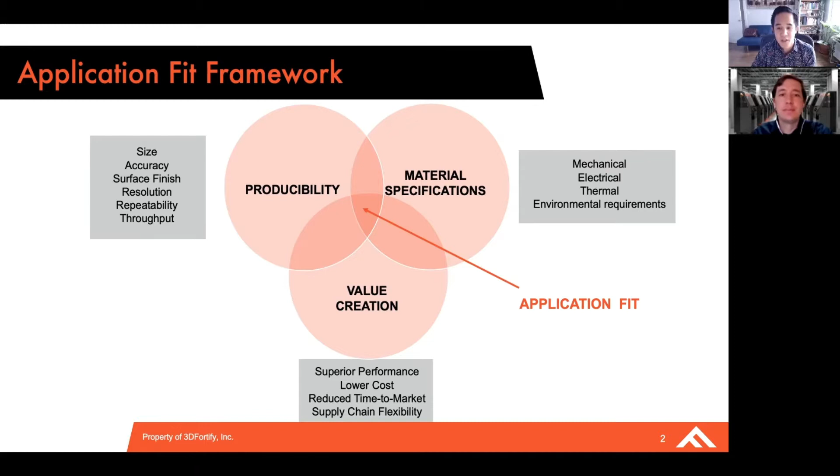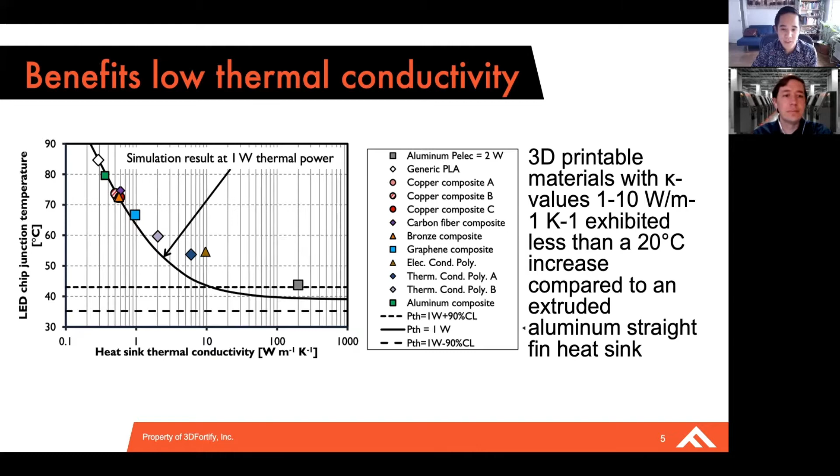Now, there have also been many studies performed on the efficacy of materials with lower conductivity values to ensure that there is still useful applicability. This figure highlights that materials with lower conductivity values between 1 and 10 watts per meter Kelvin still provide meaningful and adequate heat transfer, even when compared to aluminum. Some key application areas for us that fully take advantage of the benefits of polymer-based thermally conductive materials are high power electronics, fluid heat exchangers, and lighting applications.

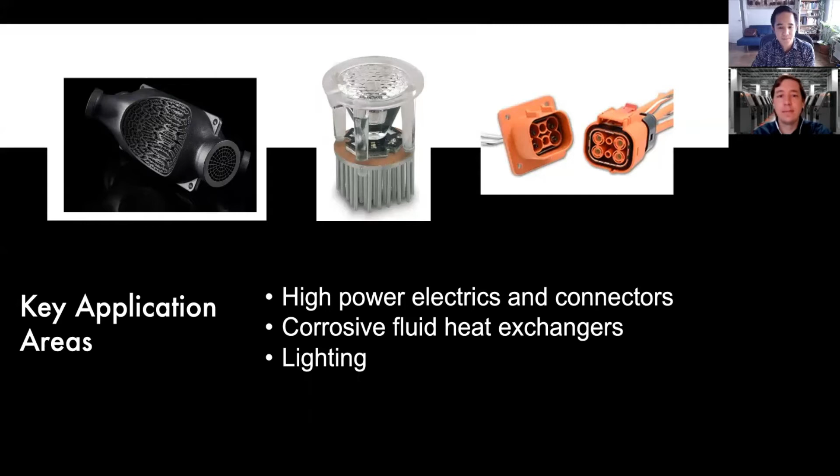Now, 3D printed ESD materials, on the other hand, provide many unique nuggets of value for those in industries such as electronic and PCB assembly. Oftentimes, ESD-related materials are injection molded or machined, leading to long lead times and limited geometric complexity. Additive ESD materials, on the other hand, require no CNC milling while still providing high dimensional accuracy. Combining ESD fillers in a high temperature photopolymer resin system enables the use of these materials in high temperature applications where this material would need to resist forces such as creep.

Lastly, by printing these materials on demand, you can shave off up to 90% of the lead time for procurement when compared to traditional manufacturing. Some key application areas for us to fully take advantage of ESD materials are high power manufacturing aids such as jigs and fixtures, ESD safe required machine tools, and materials that operate in combustible environments.

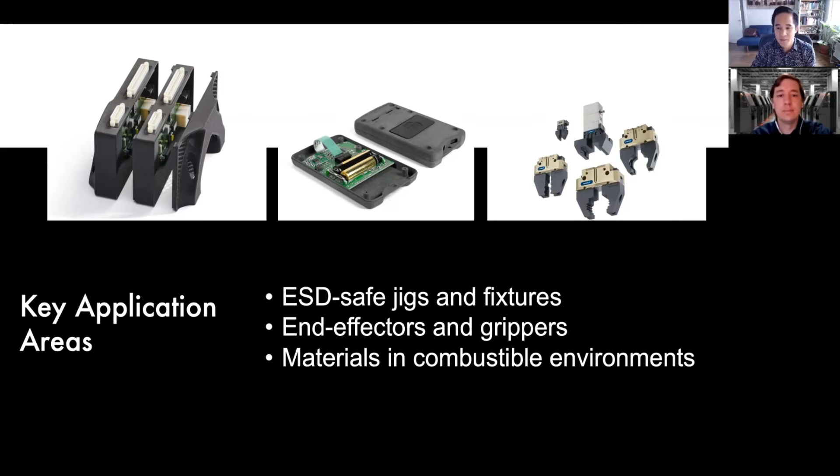One of the key factors that are driving the market towards using additives in these applications is the fact that volumes are being driven down significantly due to several trends. Macroeconomic factors such as the electrification of vehicles require OEMs to consider more cost-effective manufacturing strategies such as 3D printing. Furthermore, design for additive manufacturing allows for performance benefits that are otherwise unattainable in traditional manufacturing.

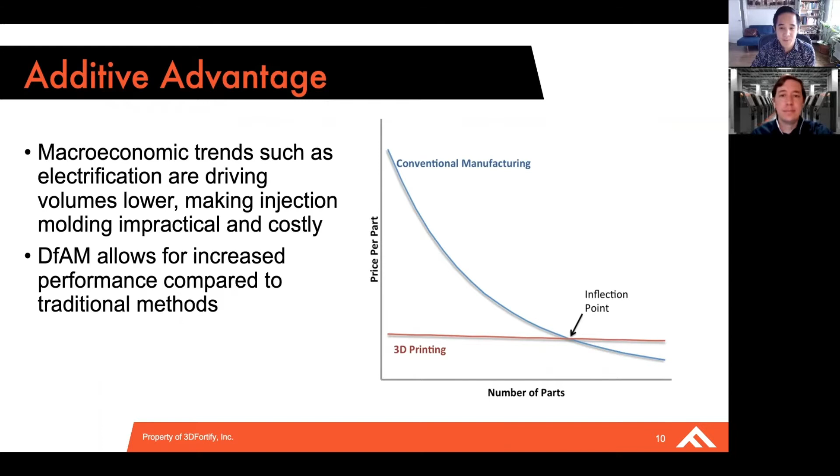So, however, not all additive is created equal. All of the current 3D printing materials that are thermally conductive are thermoplastic based, which have limited scalability and complexity. DLP photopolymer 3D printing, however, can achieve best-in-class surface finish on manufacturing platforms that is proven to scale. By combining this with Fortify's processing capabilities such as CKM and Fluxprint, we are able to print complex thermally and electrically conductive components at scale.

With that, I'm going to hand it off to my colleague, Dr. Randy Erb, to talk about some of the data.

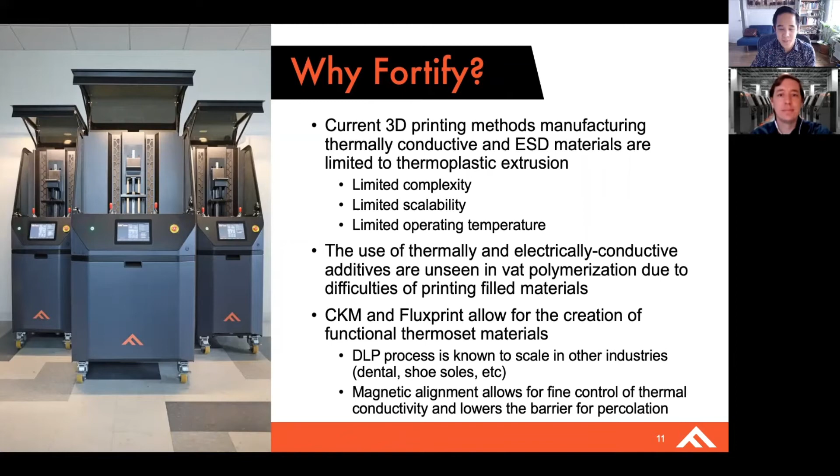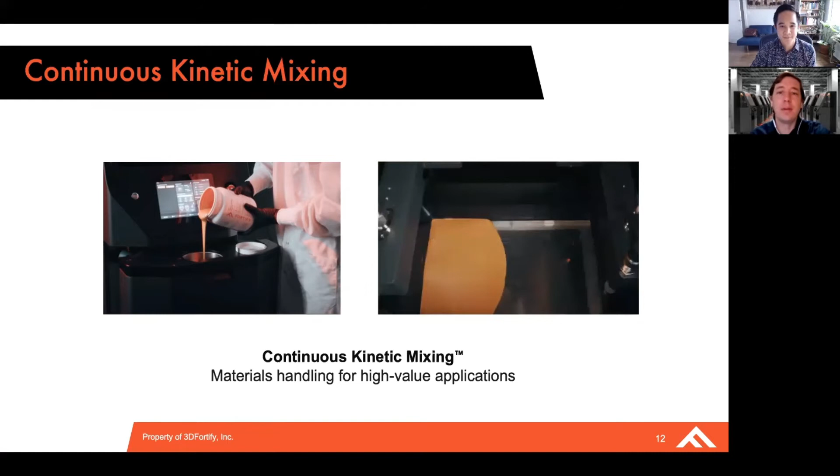Great, thanks, Carlo. So CKM, or continuous kinetic mixing, is a key hardware innovation here at Fortify. It allows for complete homogenization of filled photopolymers. It also allows for control of temperature of the resins to let us manipulate the viscosity and improve printability. CKM ensures that the first layer of our parts are the same as our last layer.

In the next slide, we see a second key hardware innovation at Fortify, Fluxprint. This allows for the application of magnetic fields during the print, and it enables the texturing of the microstructure within particle-filled systems. Textured microstructure enables enhanced performance in mechanical, electromagnetic, and thermal applications.

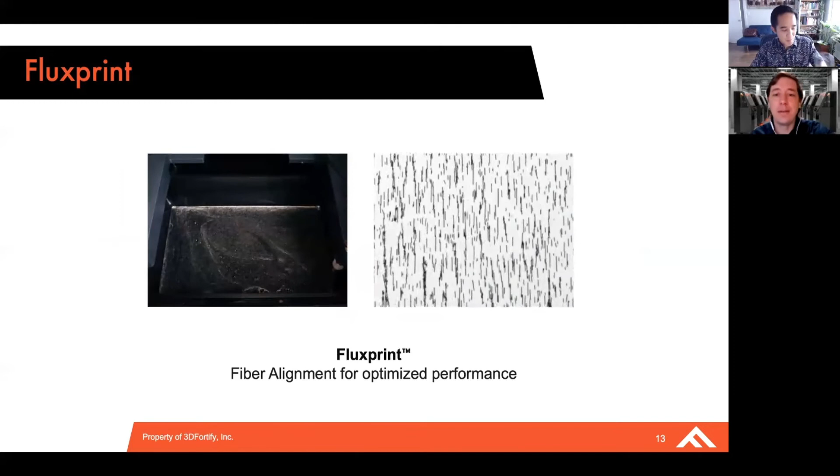On the next slide, let's look at an example of Fluxprint. Not only can we align fibers within a layer, but inside a single layer, we can have different areas of different alignment. In this image, you see milled carbon fibers that have been doped and respond to the magnetic fields that we have applied. Now, imagine microstructures like this in materials that are electrically or thermally conductive. This is an exciting concept for tailoring complex conductivity pathways in 2D or 3D within printed parts.

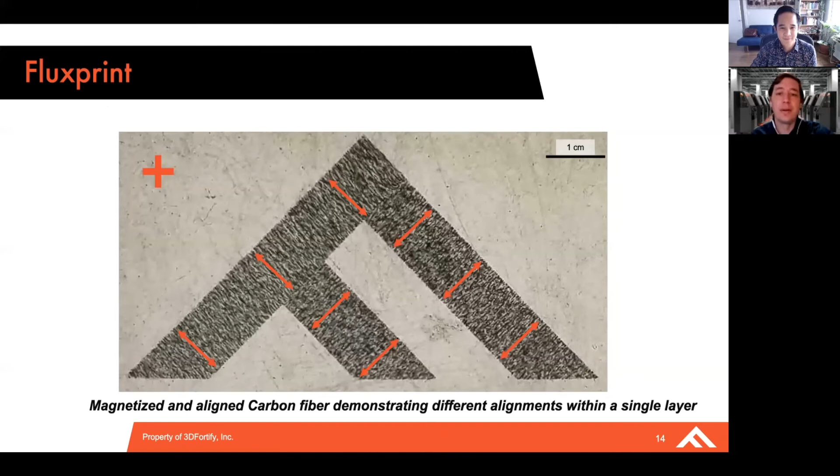There is therefore a percolation threshold that becomes essential to hit to achieve meaningful conductivity. These thresholds are generally consistent with spikes in viscosity of a resin. However, field application allows us to purposefully move these thresholds to lower particle volume fractions while maintaining printable, albeit high viscosities.

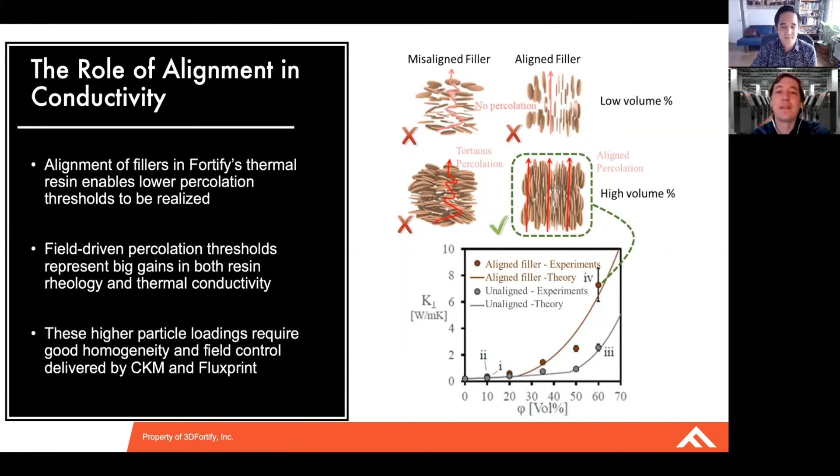On the next slide, we highlight a unique opportunity for Fortify's approach to thermally conductive material. One of the unique opportunities we have identified is dielectric thermal conductors. Certain particles conduct through phonons and not electrons. We have found a unique place in this phase diagram on the right for thermal management materials. Our resins are both electrically insulative and thermally conductive. This combination creates exciting opportunities not accessible to metals in electrical and RF applications.

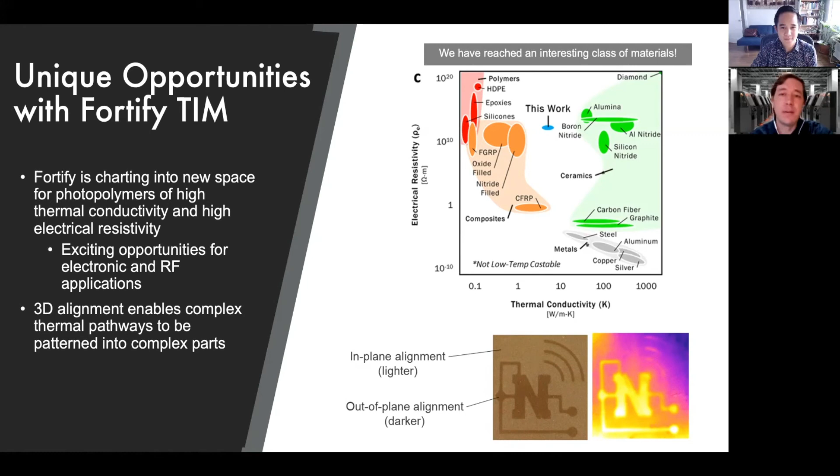On the next slide, we demonstrate that tailoring conductivity is possible with filler that is also electrically conductive. Here we see the first ESD photopolymer available enabled by our CKM technology. CKM allows for highly homogeneous and quite tunable ESD resins to be printed. In a first embodiment here, we present a resin that produces parts that are in the static dissipative classification. These parts are incredibly strong, high resolution, and speak to ESD applications.

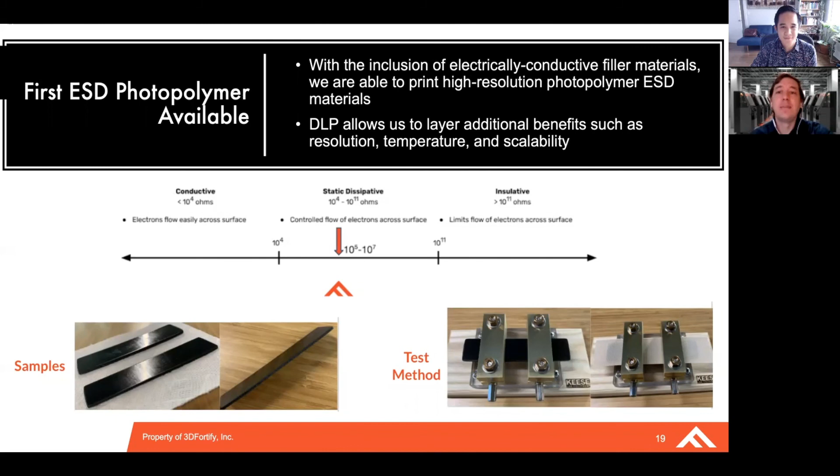Back to you, Carlo. Thanks, Randy. So we hope we demonstrated the value of 3D printed conductive parts through this tech talk. By filling and aligning our photopolymer composites, we imbue upon our components properties previously unseen in the 3D printing industry.